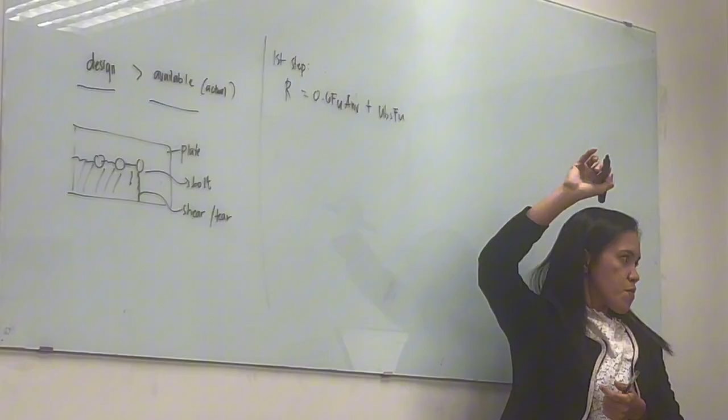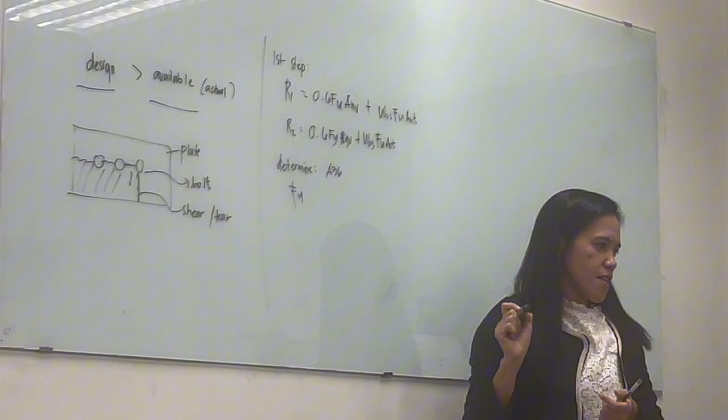So, what should we first determine? What is the FU of A36? It's saying A36 is the material used. What is the FU? Ultimate strength of A36. You forgot already? 58. 58 KSI. If you convert it into metric, that is 400 MPa.

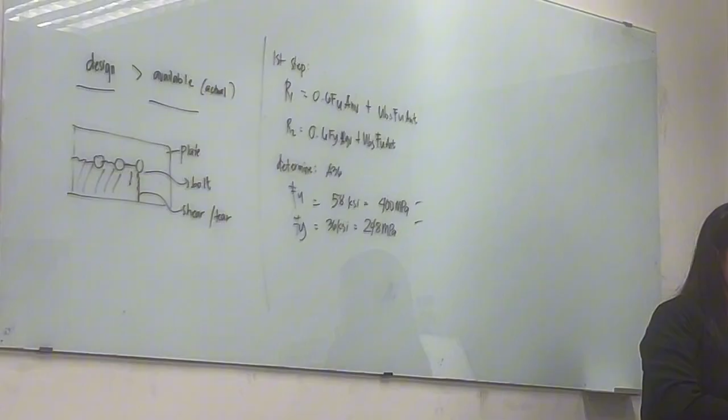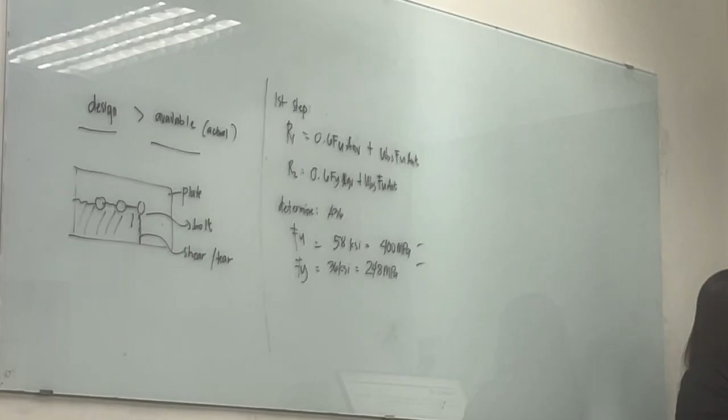The diameter is 20 mm. Then, how many pieces? Three. So, if ever I will consider the effective diameter, because like this...

Effective diameter in English units, what we use is 1/16, based on AISC. 1/16 plus 1/16 plus diameter of hole. But in NSCP, we will use the NSCP standard.

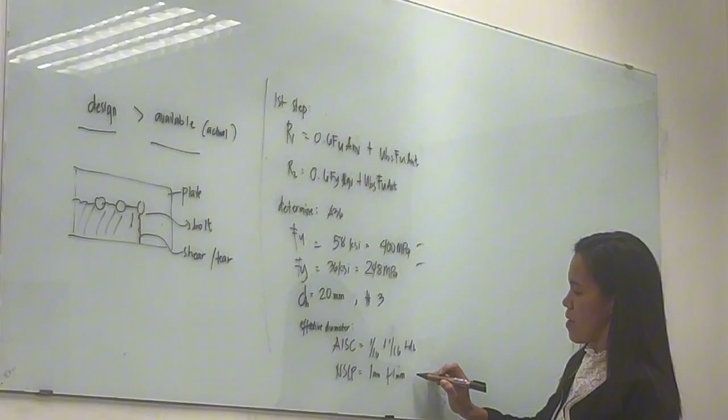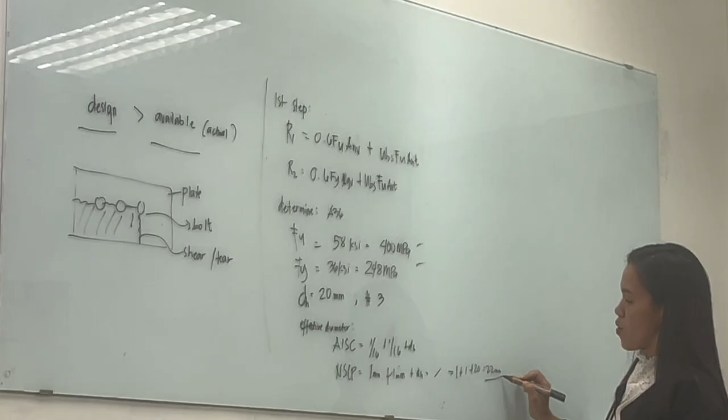We will use 1 mm plus 1 mm plus diameter of hole. So, how much is this if effective? This is what we'll use: 1 plus 1 plus 20 equals 22 mm. So always add 2 mm. If I give 16 here, that's 18. That's the effective diameter of the hole, according to NSCP.

That's according to NSCP. I'll give you a sample or a picture so you can internalize what we're solving, or the question about block shear.

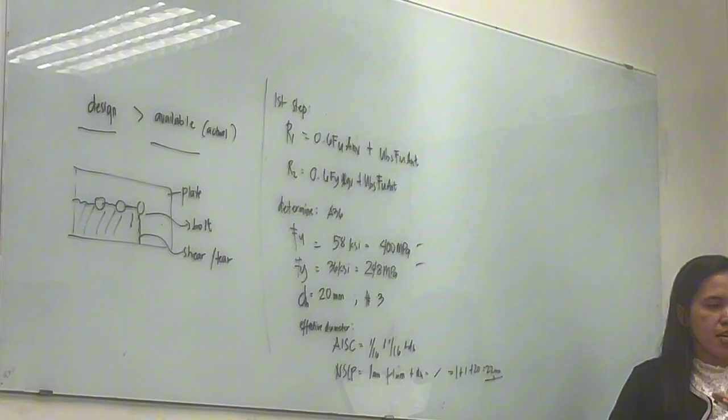So that's the picture. This is when it's welded to a gusset plate, critical section. Actually this is an I-beam, so the plate isn't there yet. I'm just giving you an idea.

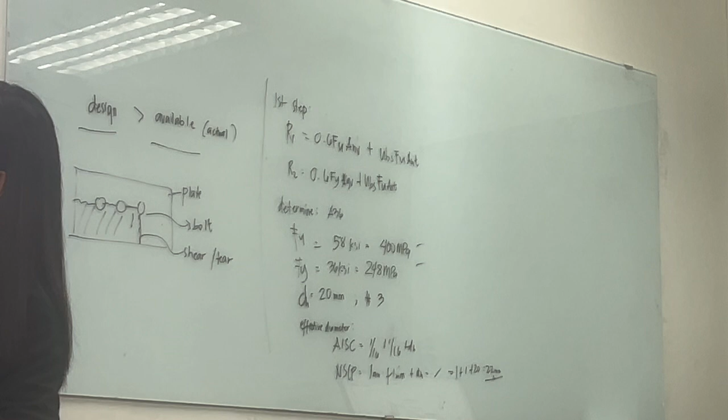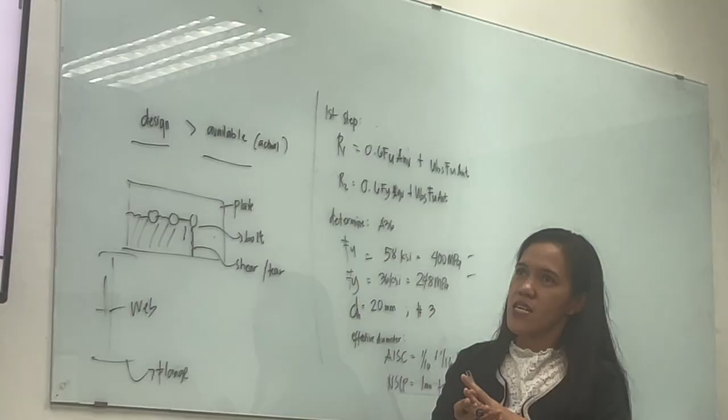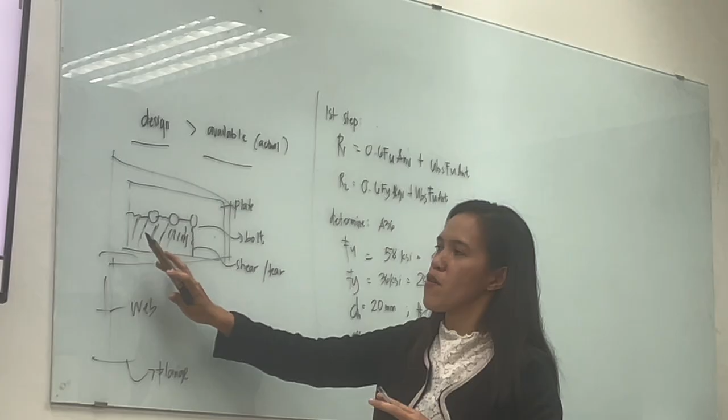About the weld, which I taught last time, right? To connect the I-beam to the gusset plate, in the computation they always assume, we will always assume that the failure is shear. Meaning, when something moves, the bottom part usually fails first. This is because, for example, in our first picture...

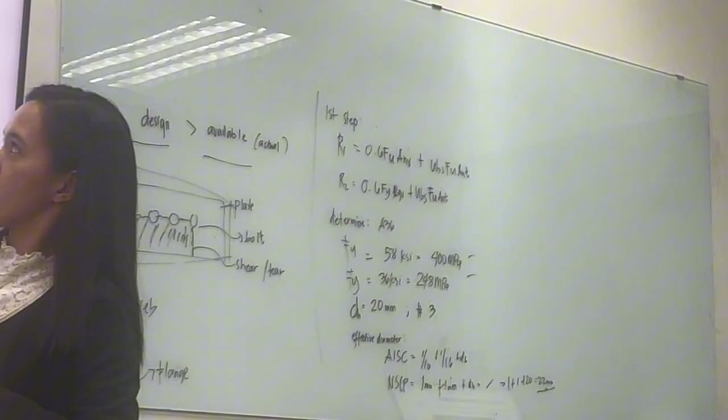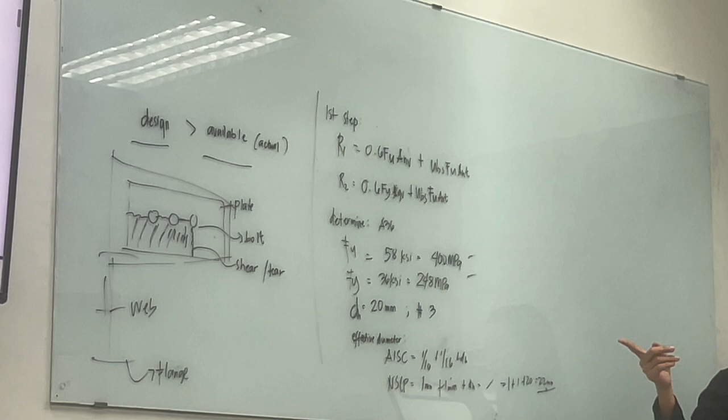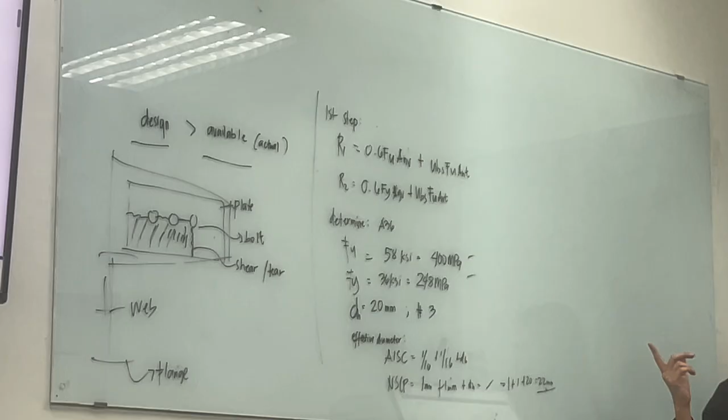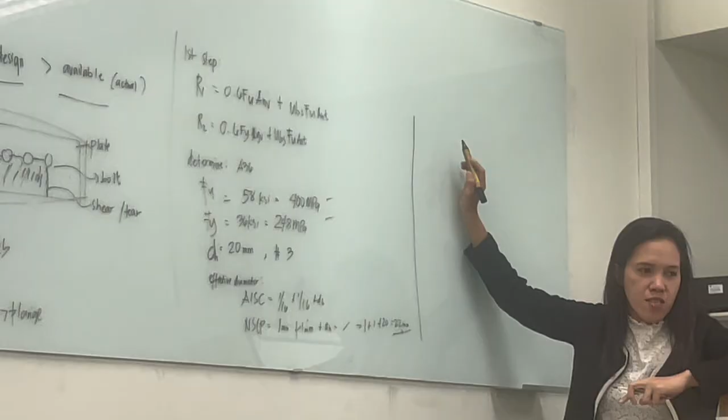So that's number 1. This I've laid out step by step so you'll be guided more. Yield strength 248, 400 MPa. Next is substitute.

So what's still missing, you have FU, you have FY. What are the missing variables? UBS, Anv, AGV.

UBS is 1. Always use 1 because usually our problem is just uniform tension stress. Because if you apply 0.5, that involves earthquake, because your I-beam is moving. So use UBS 1.

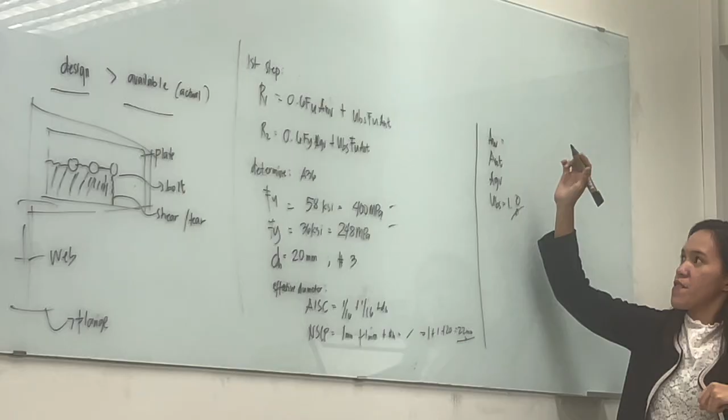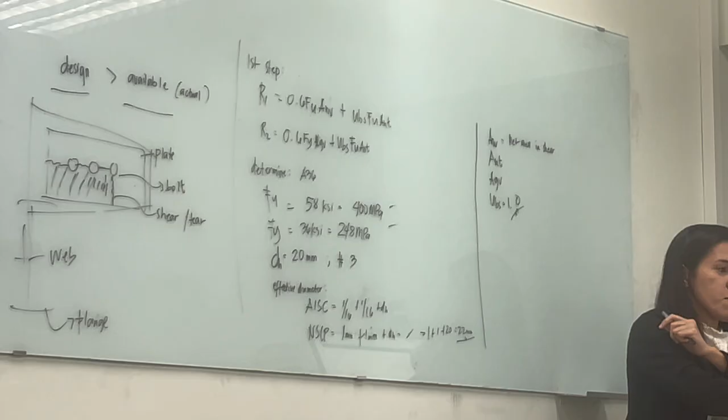So what is the meaning of Anv? Net area. Net area in shear. Actually, I already uploaded this to your Blackboard. Okay, net area in shear.

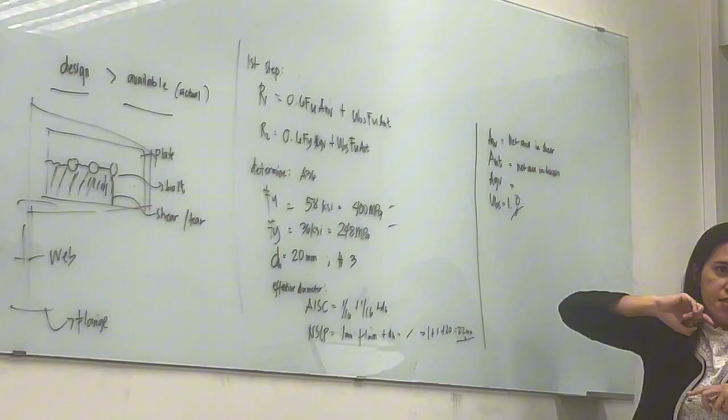Then next, Ant, net area in tension. And Agv, gross area in shear.

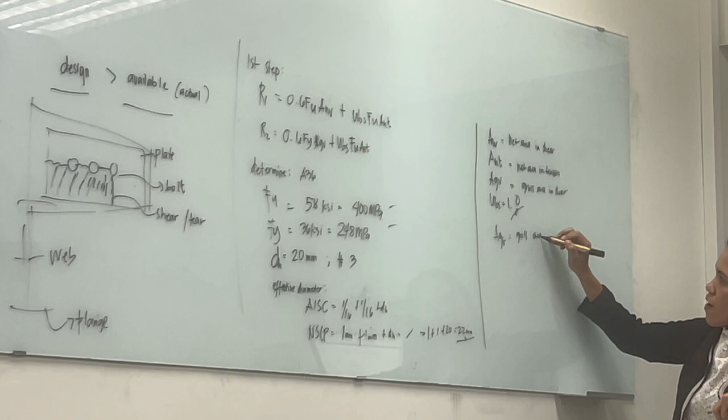So the design strength of LRFD is again 0.75, and then the allowable strength is 2. I encourage you to have your paper and pen so you can follow the solving.

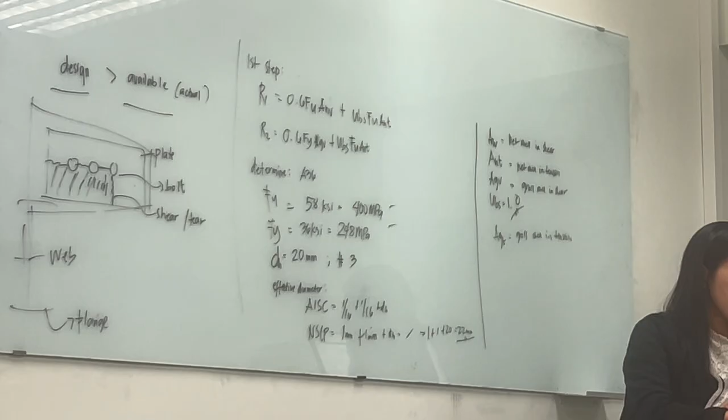It's better to solve it so the dimensions from the figure, the dimensions we got from there, plate thickness, determine the dimension from the figure.

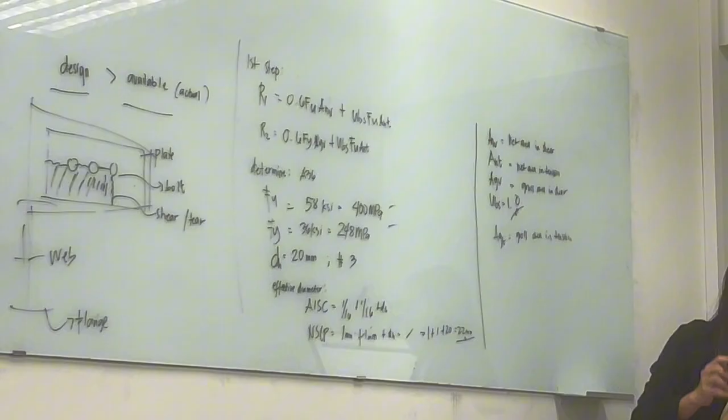Plate thickness, T is 10 mm. And then bolt diameter 20 mm. As I said earlier, 22 mm is standard. Edge distance to first bolt, given there is 38. Then spacing between bolts, 76.

So distance from bolt line to plate edge, gauge is 26.18. Meaning from the top, what he considers is 26.18, distance from bolt line to plate edge. Okay, that's given already.

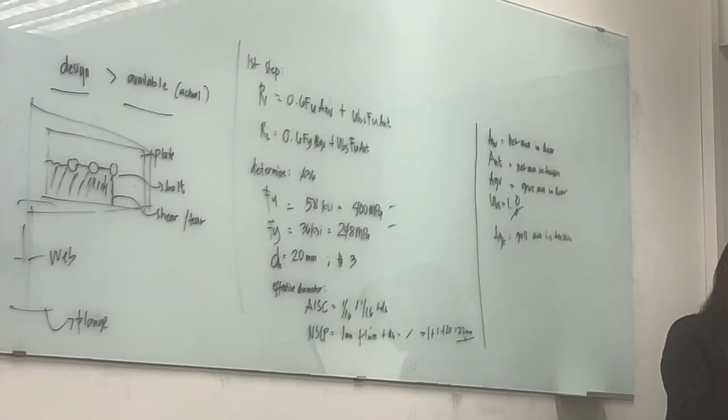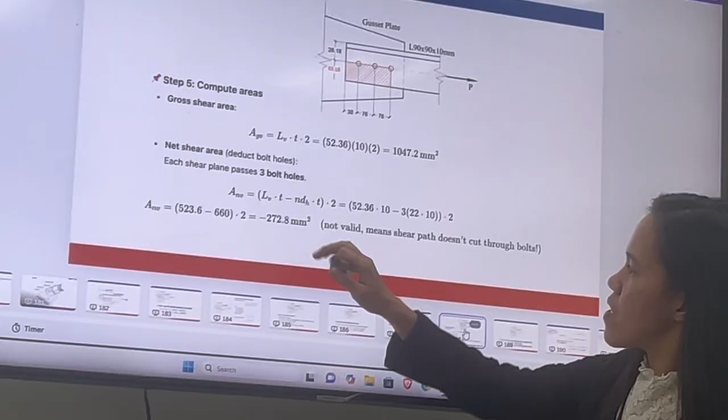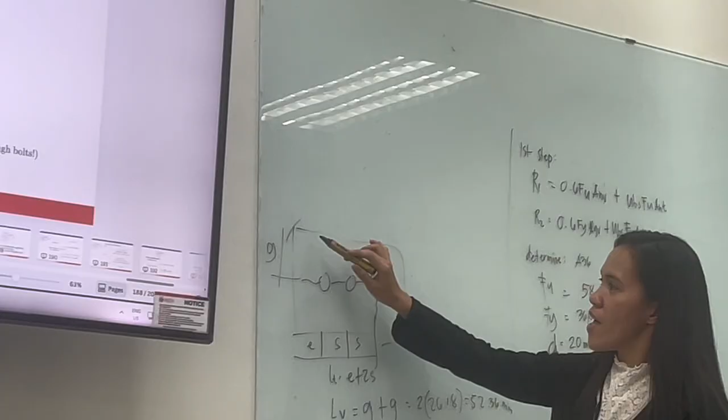-272.8. So not valid, meaning the shear path doesn't cut through bolts. Meaning it doesn't indicate that this bolt is the reason it sheared. So it's possible that this portion of the block, if this result shows, that portion of the block sheared but not basically because of the bolt. So that's why we need the next step.